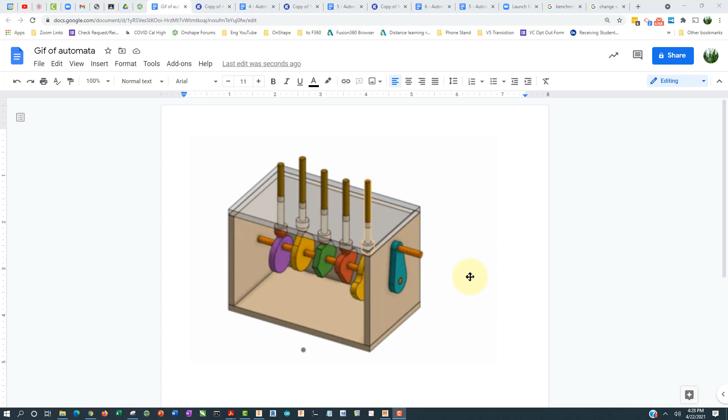Here's a GIF of the thing we're going to make, and we've made the cams now, and we need to make the box next. This will be the structure that houses the whole cam and follower system. If you go to the assignment, it tells you a number of things about what to call the document and the parts—I'll let you refer to those.

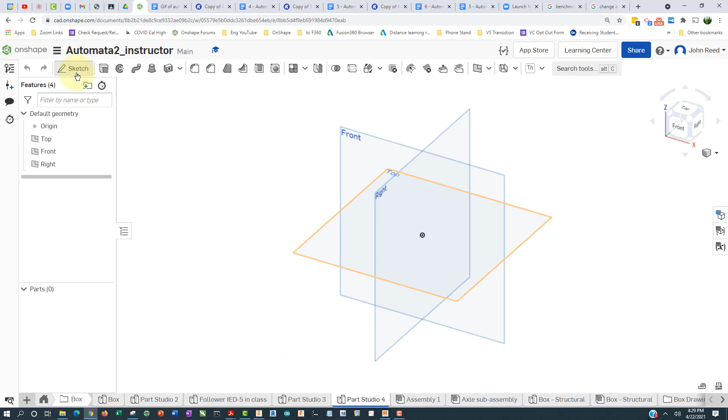I'm just going to make the parts quickly here in case you had trouble in class. So we'll make a sketch first on the top plane. Press N to get the sketch plane normal to you, then put a center point rectangle here, 6.5 by 4 inches, and we can extrude that a distance of 0.25.

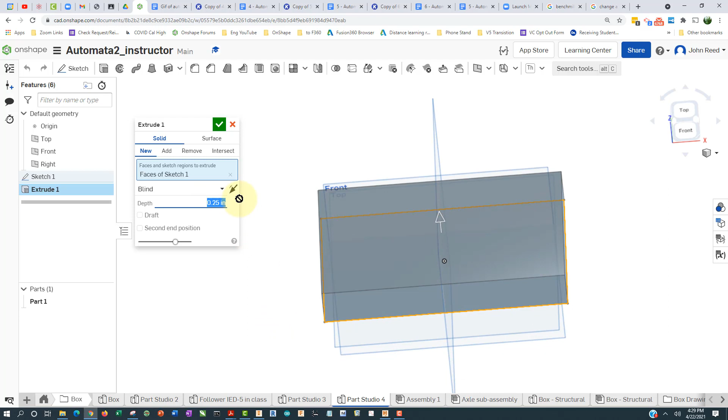There we go. Shift 7 to make it isometric. Press P to get rid of those planes we don't need anymore. Press F to bring it up, and there's our bottom. Let's go ahead and immediately rename it so we don't lose track of what we have, because we're going to have multiple parts in this part studio.

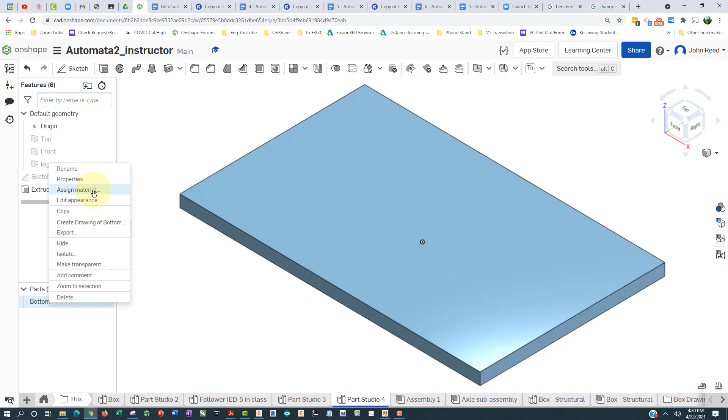So we've got the bottom here, and I'm going to assign it the material of medium density fiber board, MDF. And therefore I'm going to change its appearance to be sort of brownish, which is what MDF looks like.

I have been fastidiously renaming all these sketches and extrusions just so that I can quickly identify any problems for troubleshooting. This is a pretty simple thing we're doing today, so this is probably not needed, but I'm going to do it just to illustrate doing it.

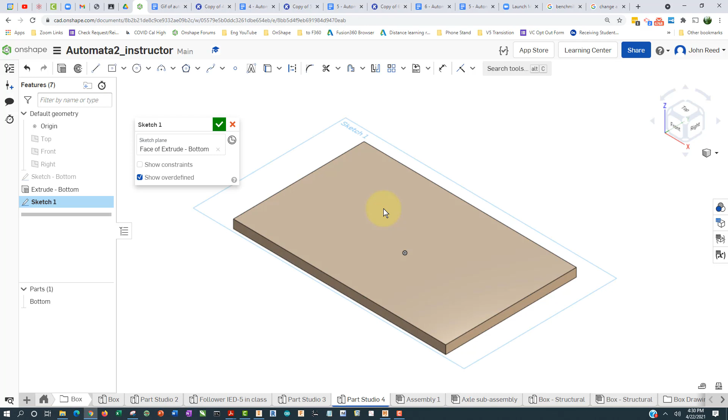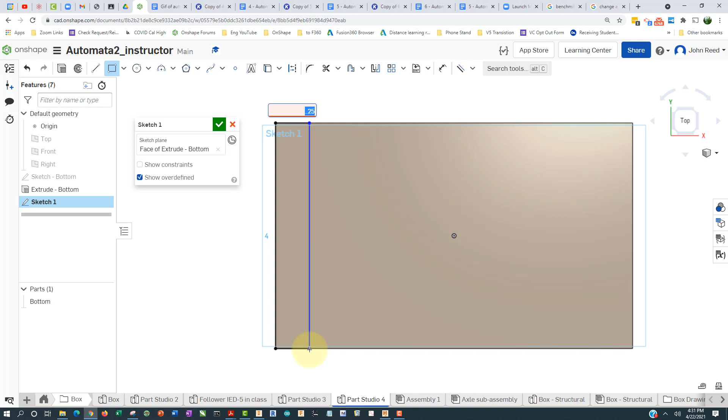Now we're going to use the geometry of the existing part, the bottom, to help us make the subsequent parts. We'll put a sketch on the top face, press N to make it normal to you, then take a corner rectangle and use the geometry here. We'll make a coincident constraint here, pull out, make another coincident constraint there, and for the thickness that's always 0.25 inches—I have one too many decimal points. There we go. So again, we've used the existing geometry to help us make subsequent parts.

I'll do the same over here. Again, these are the sides, 0.25. And Shift 7 will make it isometric.

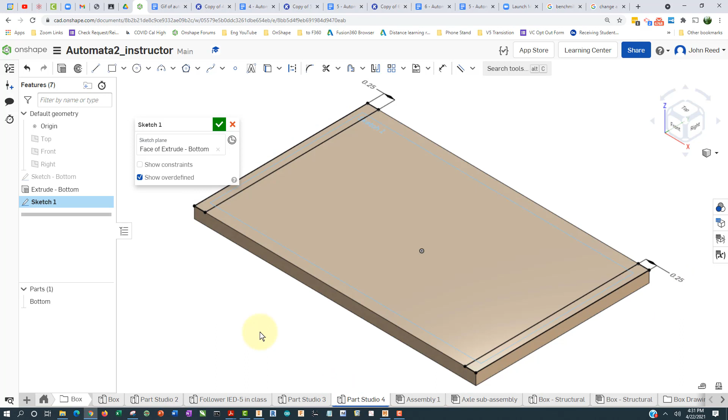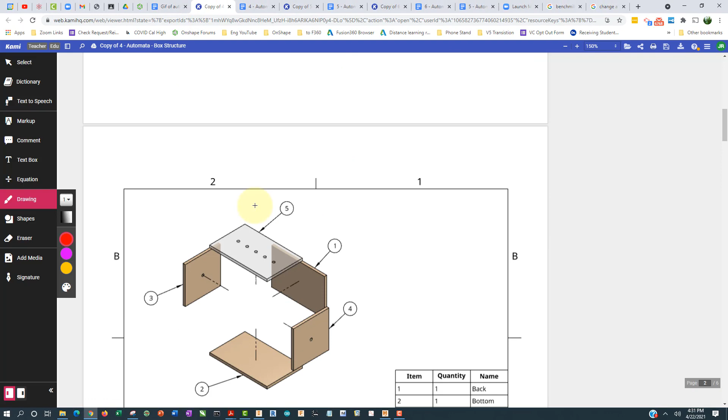While I could make the back in this sketch as well, I'm going to separate it out into a different sketch. I'll accept that, then rename my sketch here as sides, and extrude here and here. I'll make sure I select new in the extrude window, and go up 4 inches as per the dimension drawings for the sides, which are right here—so they're 4 inches tall, and we've got it.

And it made two new parts—the left one first—and even though these are going to be identical, let's go ahead and name these, or make them as separate parts. So side right, and we'll hold off on assigning a material to them or changing their color.

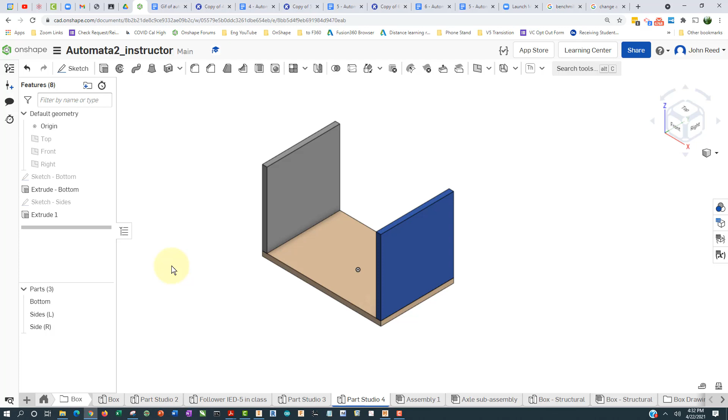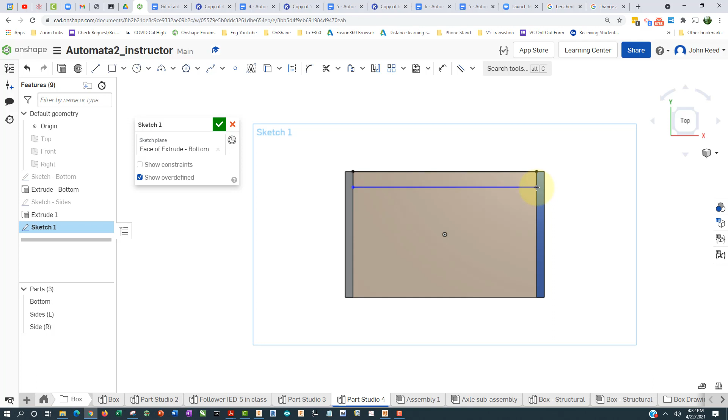Now we need to make the back, and again the existing geometry will help us do that. I'm going to take a rectangle, coincident there, and then over here. Right now it prompts me for that 6, and if I hit enter to accept that, it will throw an error. I don't know why it does that in Onshape, but I'll hit escape, which lets me go in with the dimension tool and dimension this part as 0.25, and now it's fully constrained—it's all black.

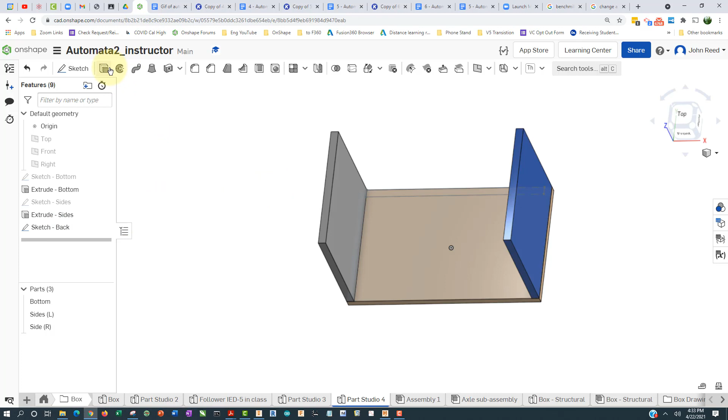So I'll accept that, and I forgot to rename some of these sides. The sketch I just made is for the back. Now let's extrude that—I can pull that up, but I'm going to make it 4 as per the dimension drawings, and it is a new part. So I've got my back. I'll rename it B-A-C-K.

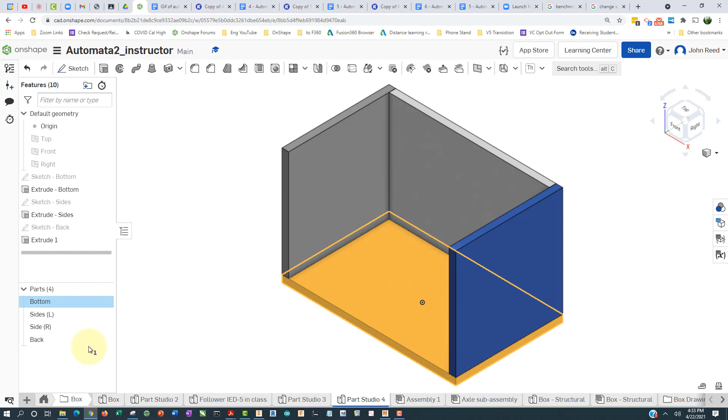Now I'm going to grab all four of these—the bottom, sides, and back—so if I click on bottom, shift, back, it'll take them all. I'm going to assign a material, and it'll take the MDF material I defined first, then right click, edit the appearance, and make it this brown—all of them are now MDF brown.

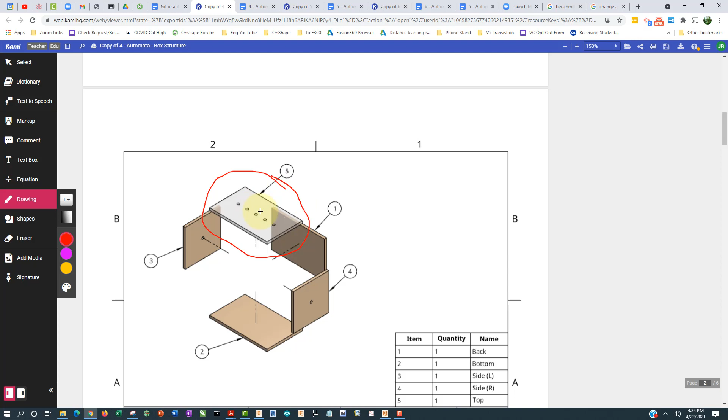If we go back to the assignment document, what you're going to see is that the top is clear acrylic and it's got holes in it, so we need to make that now. To do that, let me make sure I rename my extrude here.

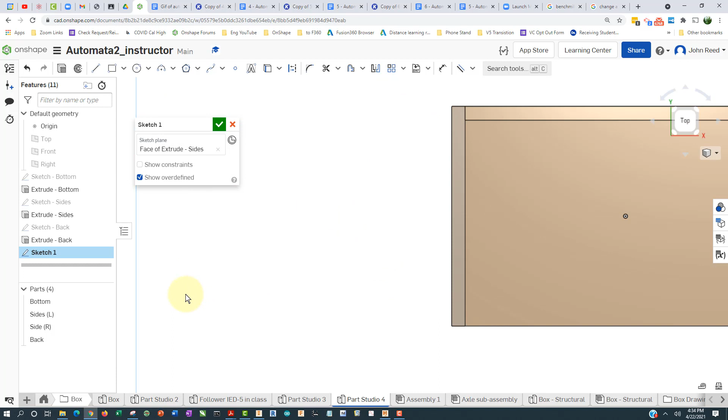I'm going to put a sketch right on top of one of the sides, press N, and then I'm going to make a rectangle that's defined by the corners of the top. There we go, I'll accept that sketch.

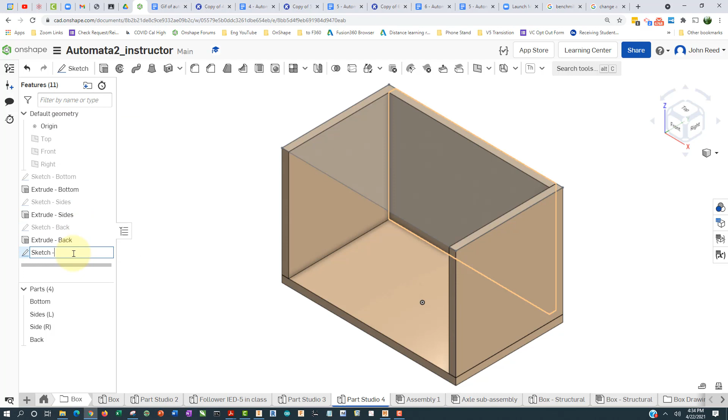Let's see, I'm going to extrude up. I'm going to extrude up by a quarter inch, and for some reason it doesn't pick this one up. That's going to be 0.25, and we'll accept that.

Okay, so now we just need to rename that as the top.

Now we could put the holes in the sketch here. I got the sketch for the top there, but I'm going to break it out a little bit. Let me just finish my fastidious naming. Okay, let's put a sketch. We'll change the material in a minute. Let's put a sketch here.

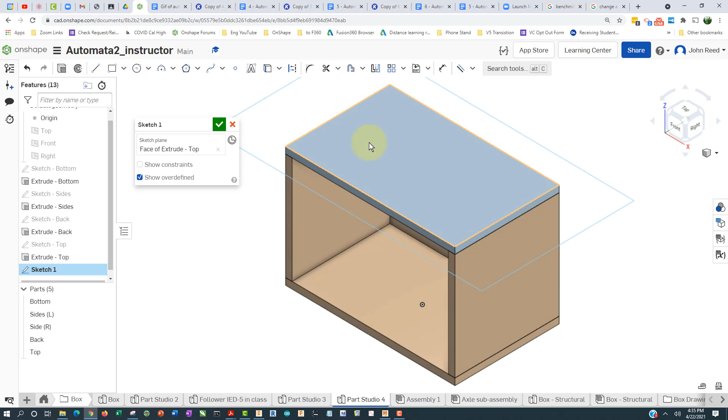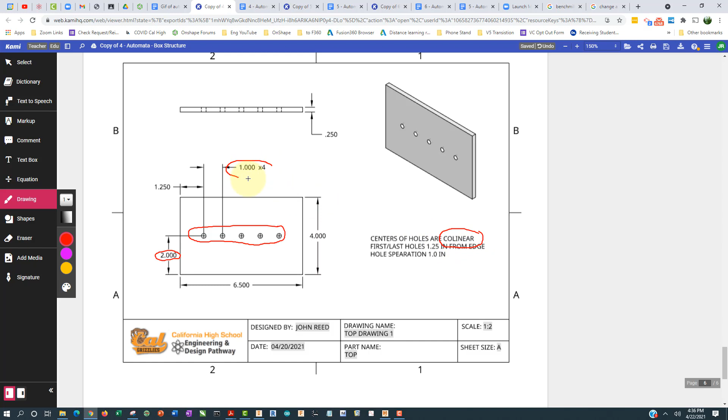We'll press N. And you'll notice if you go back to the dimension drawing for the top that we have these five holes, and they're 2 inches from the front, so they're in the center, and they're collinear, and they're separated by 1 inch from each other and from the left edge by 1.25.

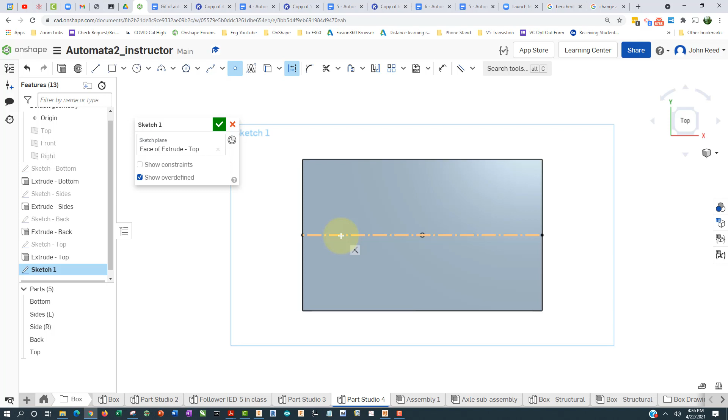Okay, so let's come here, and I'm going to use a construction line here. Let's make that a construction line, and then I'm going to put a point here: 1, 2, 3, 4, 5.

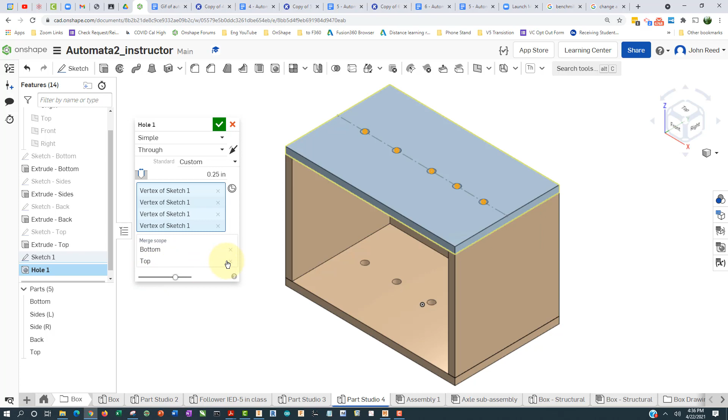Accept that sketch, and I'm going to put holes there, there, there, there, and there. And I don't want it to go all the way through to the bottom, so for the merge scope, I'm going to get rid of the bottom, and it should take care of it there. It's a simple hole, a through hole, and it's 0.25 inch diameter.

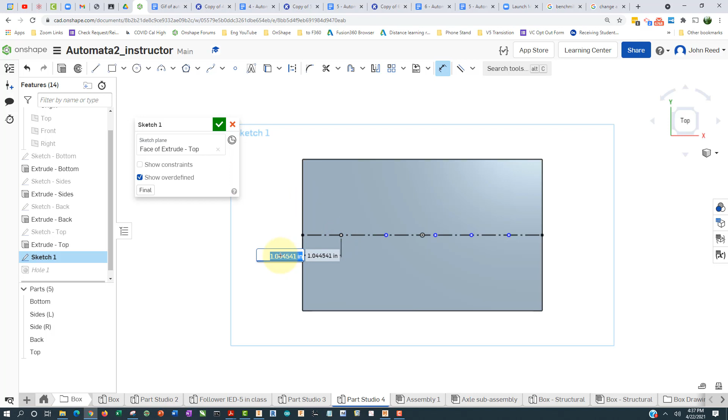So I think I got it made there, but I forgot to do something, didn't I? Something that's very basic and fundamental. I was too excited about making those holes. I got to dimension them, or locate them I should say.

So they are 1.25 from the left edge, and then all these are separated by 1. So we can just sequentially go in here and...

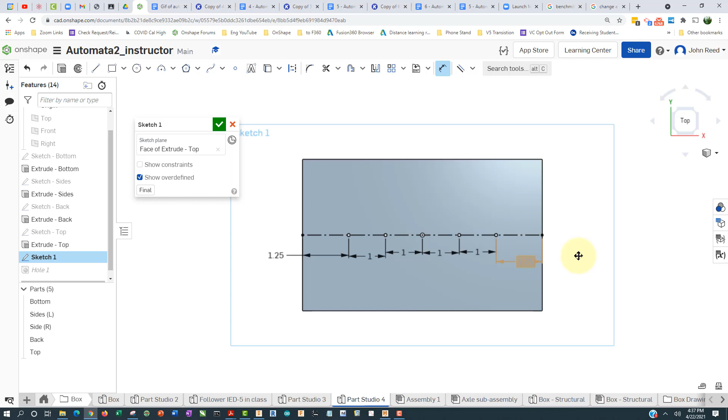separate them by 1. And I want to make sure I'm doing things right, so I'm going to try to dimension there, but it's already fully constrained, the sketch is, so this is going to be a driven dimension. It'll be in gray, and it's saying, hey, I didn't change anything, I'm just documenting what's there. So I think this is okay, this is what we want. So I'll accept that.

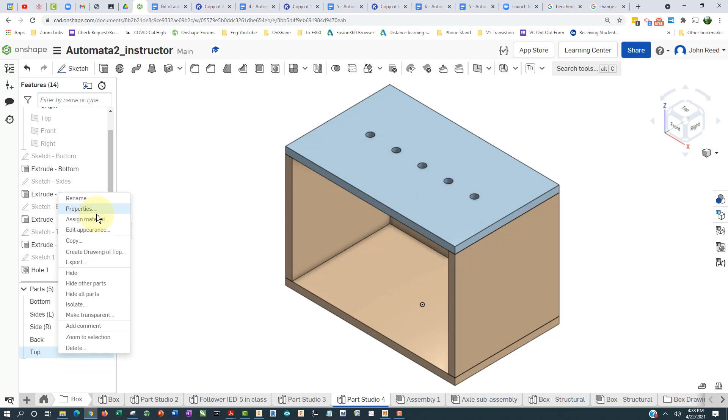And there they are. Now let's go back to the top and assign a material. That'll be acrylic. And let's edit its appearance to look like acrylic, so it's going to be a little bit transparent, maybe that color. And so there we have our box.

But you'll notice I did forget something. Very forgetful today. That's useful that I'm naming everything. So this sketch is for the holes—how about top holes—and this is for the top. And I forgot to make holes in the sides. So I can look back at my feature list and I can immediately find out what I want. I want this guy right here.

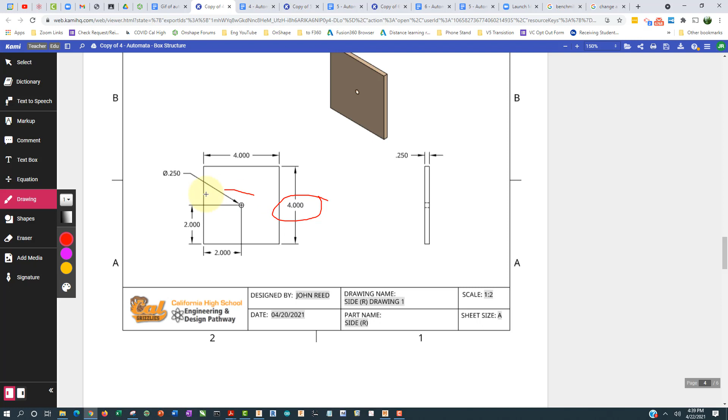But I think I'm going to add another sketch. Let's see. Yeah, I think I'm just going to add another sketch on the left side here. Press N, and then I want to find the center. If we go back to the dimension drawing, you can see that the holes in the side are right in the middle, so they're 2 inches from each corner and have a diameter of 0.25.

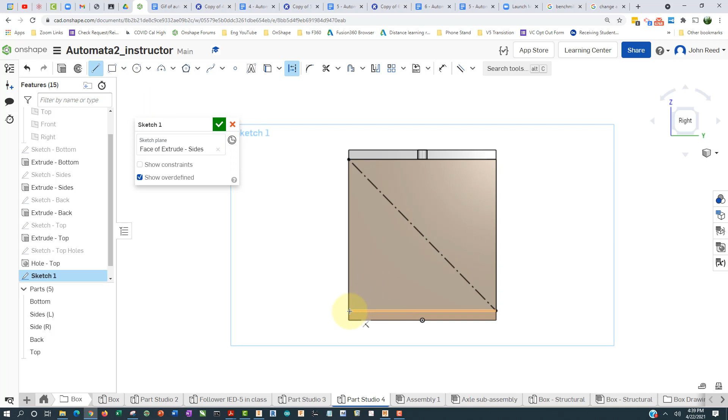And so let's go back there, and I'm going to use the old trick—there may be an easier way to find the center of this thing, but I'm going to use this technique of putting crisscross construction lines here, and then putting—let's extrude. That's okay, that little symbol right there means I'm right on the line, so I'll come out here 0.25 and yeah, I'll accept that.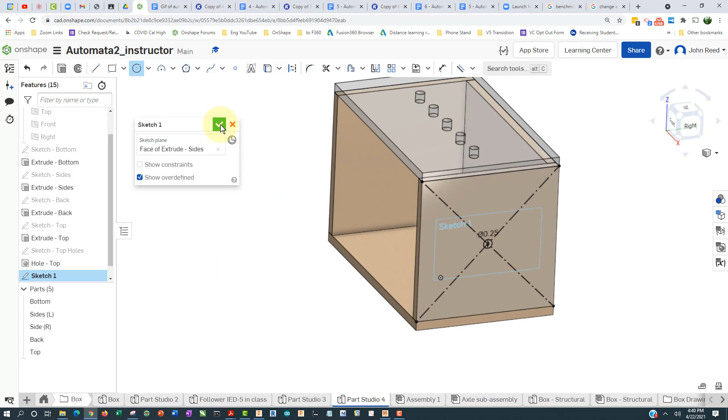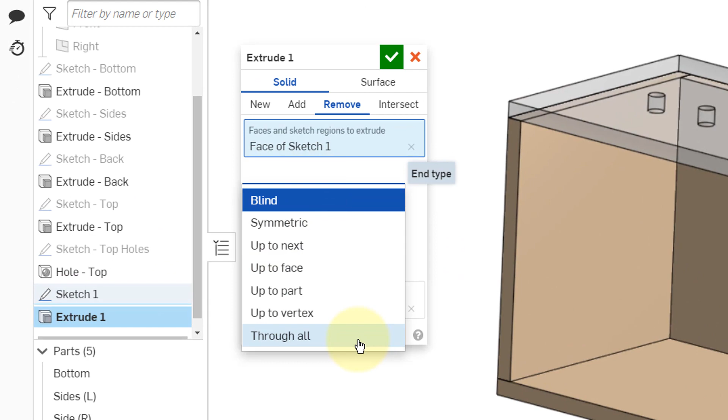Let's extrude away that hole. There we go, I'm going to remove and merge with all. Let's see, I always get this wrong here. So how about through all, merge with all, and that'll make the hole there on the other side, so it'll take it all the way through.

And I can shift 7 and I've got a sketch here. I know I probably didn't need to make a separate sketch for this, but I did. Side holes, and this is the same extrusion for side holes. I think we're done now.

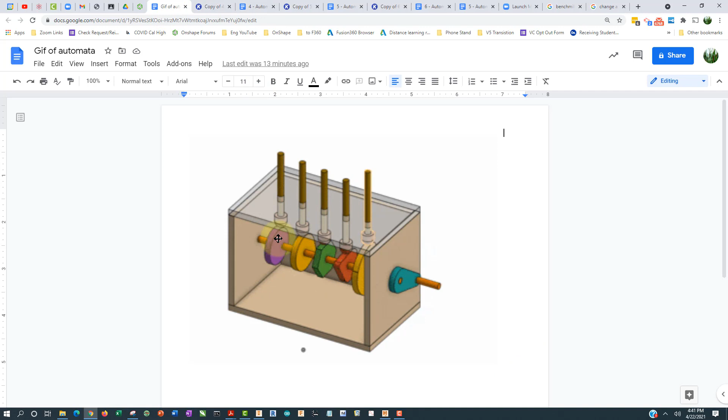What I want to do next though, before I stop, because I'm going to add more things to this—obviously if you go back to here, there's a lot more going on. So I'm going to grab everything associated with the box: there, shift there, click this folder, and I'm going to name it box. So everything associated with the creation of the box is going to be in that folder, and I can manage that very well.